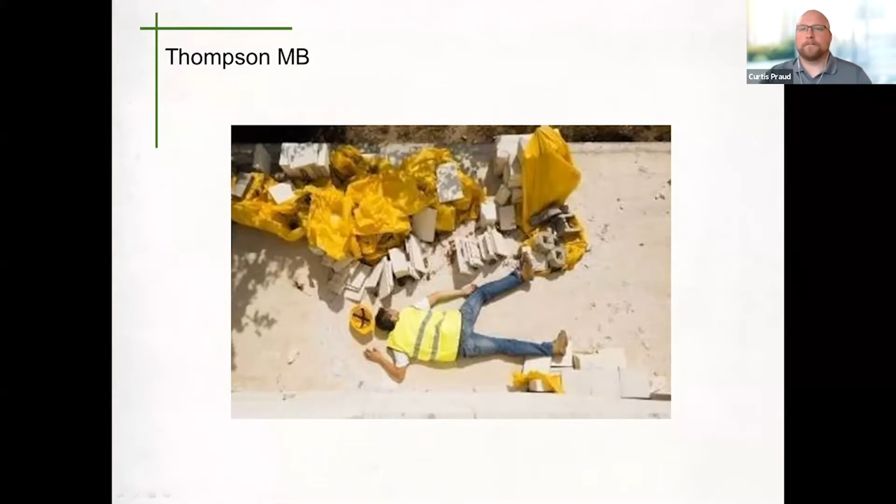On a project, both the owner and the contractor have responsibilities. The owner has the duty to ensure that their workplace complies with legislation, the site is maintained, and that it does not endanger the health and safety of anybody. Besides the owner, the contractor is responsible for safety as well. They have the highest level of responsibility to ensure that the work site and all the work that happens is done safely. This is fairly straightforward.

Contractors set the minimum standard for the site, and everyone follows the law, but we must never fall below the site minimum standards or the regulatory minimum standards.

In Saskatchewan, the Employment Act talks about general duties of a prime contractor. Like I stated earlier, on January 1st, 2015, prime contractor regulations were added to the Saskatchewan Employment Act and Regulations, becoming effective in law. The prime contractor regulations did get their own blue pages as well.

These regulations lay out specifically when a prime contractor is needed and the authority of the prime. It also details the expectations of owners, employers, self-employed persons, prime contractors, and the specific activities that each workplace group shall perform.

Due to the hazardous nature of three industries in Saskatchewan, prime contractor applies strictly to the oil and gas industry, the forestry industry, and finally the construction industry.

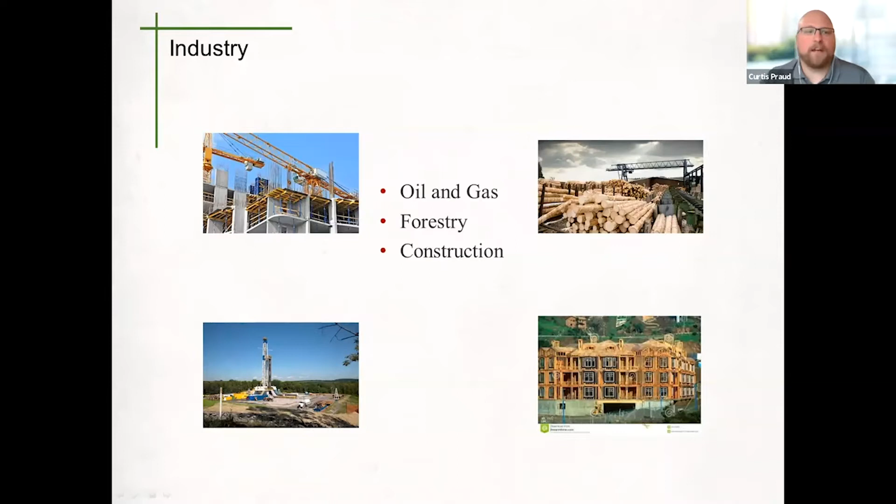This does include all multi-employer industrial, commercial, and residential projects, with one exception. The construction industry does not include activities or operations undertaken by a person in connection with construction or renovation if the worksite has dwellings that are less than 4 units.

It is important to realize the definition of construction means the erection, alteration, renovation, repair, dismantling, demolition, structural maintenance, and painting of a structure. This also includes land clearing, earth moving, grading, excavating, trenching, digging, boring, drilling, blasting, and concreting, and the installation of any plant.

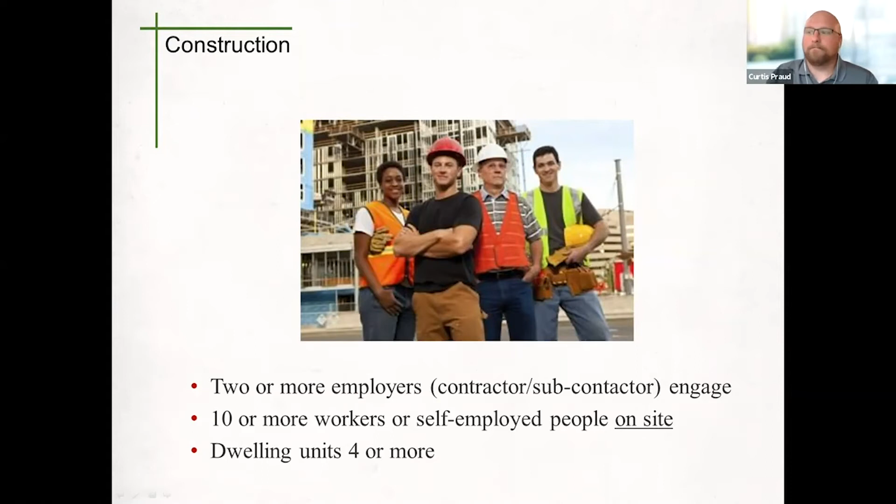In the construction industry, there will be some multi-employer worksites that do not require a prime contractor. For example, a single home construction or renovation, regardless of the number of contractors. So as you can see in these pictures, that is a single home dwelling meant for one family.

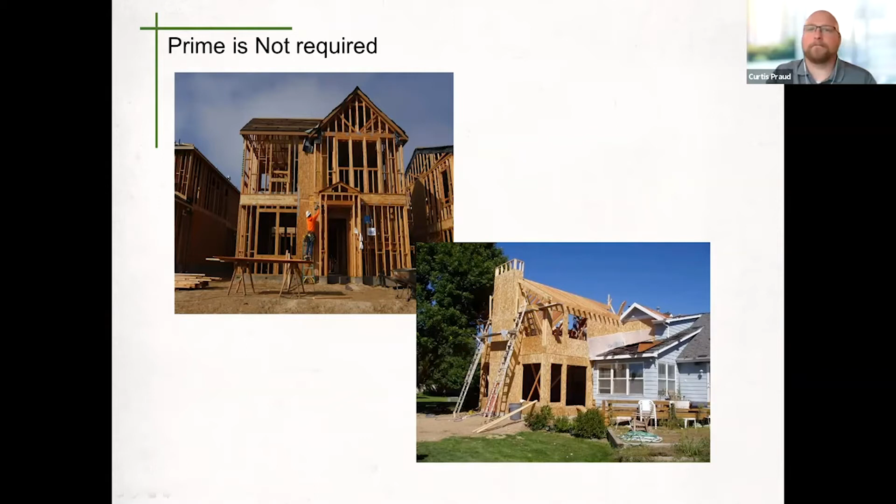Here's a large multi-employer single unit dwelling. This is TV celebrity Drake's house under construction, larger in size and scope than many commercial developments. On this site today, we have 1 general, 5 contractors, and 30 workers. In this situation, prime is not required, as this is a residential construction work site.

As a single dwelling, keep in mind that the acts and regulations are a minimum standard, and a job of this size would greatly benefit from the use of a prime contractor. But like I stated, the owner and contractor in this situation still have the requirements for safety on this site.

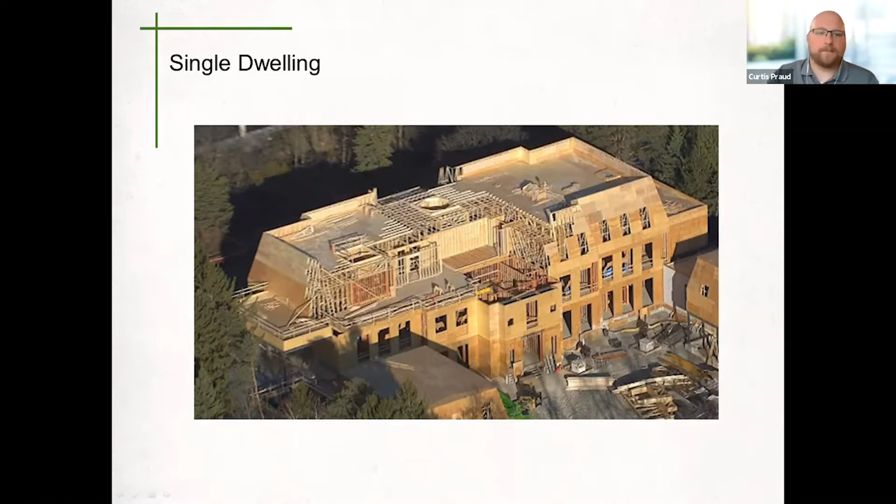Here we have a residential development. There are 8 separate lots with single detached homes on each site, built by one general contractor. All the homes are being built at the same time and are at different levels of completion. The general contractor also has a job trailer across the street. At any given time on this site, there is one general contractor, 5 subtrades, and 30 workers.

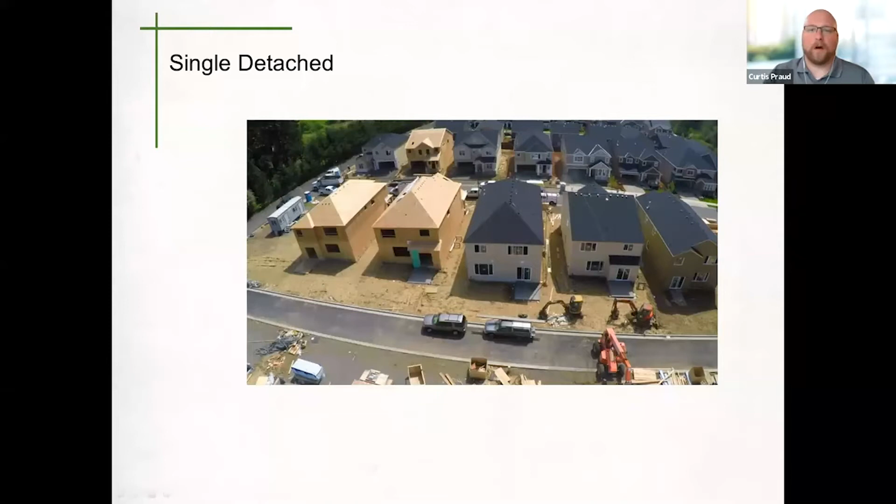In this situation, there is no prime needed, as each work site consists of a single unit dwelling. However, the Saskatchewan Employment Act does still put an onus on the contractor to provide a safe work site.

In this scenario, we have a residential development that is 1 unit with 4 dwellings. Each dwelling is a different level of completion. This is a fourplex with individually titled lots, fences, and distinct property lines separating ownership.

The only difference between this work site and the last one is the aspect of shared walls. Again, here we have 1 general, 5 subtrades, and 30 workers. Because this unit has four dwellings, it is 1 work site. Due to the shared walls and roofs, a prime contractor would be needed. Prime contractor regulations state that the only exclusion is a unit that has 3 or less dwellings. This unit has 4 dwellings.

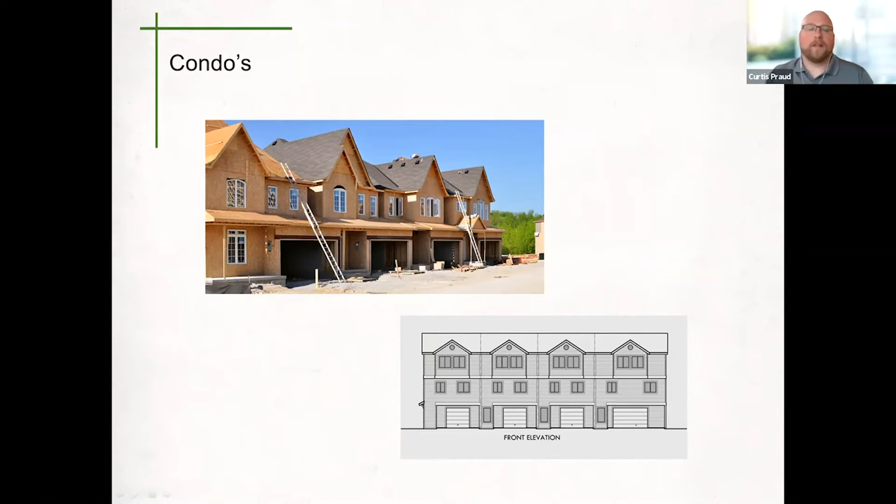This is the most interesting of all residential scenarios: the residential gated community. Here we have duplex and triplex homes built in one location. All these homes share a main address with separate addresses inside the gated community. Here we have one owner that hired 1 general contractor with 5 subtrades and 30 workers on site. So if you've been following along, all the scenarios have had 1 general, 5 subtrades, and 30 workers.

Here there's 13 buildings. 12 of them are residential duplexes, and across the street is 1 small commercial space building. Is prime required? No, because none of the 12 work sites have over 3 dwellings.

This would be different, of course, if any of these duplexes had basement suites, as that would essentially make them a fourplex. In this example, there are no basement suites.

Here there's a lot going on at the sites, like shared roadways and shared access gates and routes. This would all come into play if this was tested in courts.

So let's say we decide no prime is needed, and as an owner, I'm not assigning a prime for this project. What about the construction of the small commercial building? Here, if there were 2 employers and 10 or more workers engaged on that work site, then yes, it would fit the requirements of that specific building.

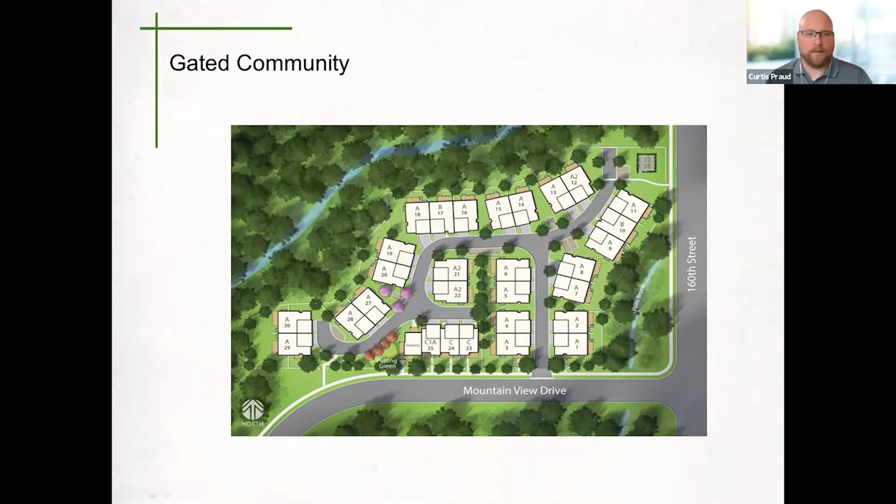But if the owner hires a general contractor to oversee the project and the general contractor arrives when the surveyors are still on site, prime contractor regulations would apply, making the owner automatically the prime contractor.

Now that we've reviewed which projects need a prime and which do not, the project owner is the one to decide who they will proceed with the project and who will be managing certain aspects. Now let's look at the owner's duties.

The owner is going to appoint a prime contractor, complete this with a written agreement contract, and comply with the prime contractor's directions. Once the owner chooses a prime contractor, they are legally responsible to that prime moving forward.

It is important that as an owner, we consider a few aspects when choosing the right prime contractor. First, we're going to look at knowledge. Do they understand applicable regulations? Are they experienced as a prime? You might want to do a background check, refer to references, things like that. Do they have the experience to identify the best equipment and people for the project, and understand the physical environment of the workplace? And training - what training have they received to do their job competently?

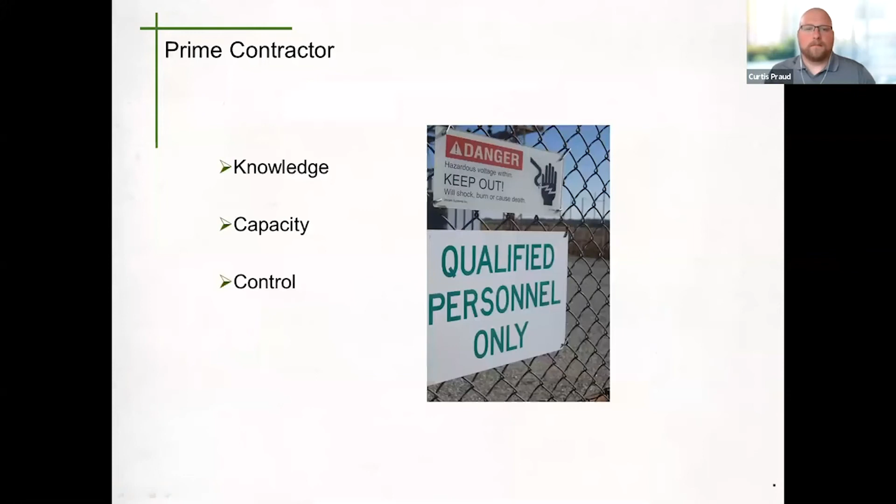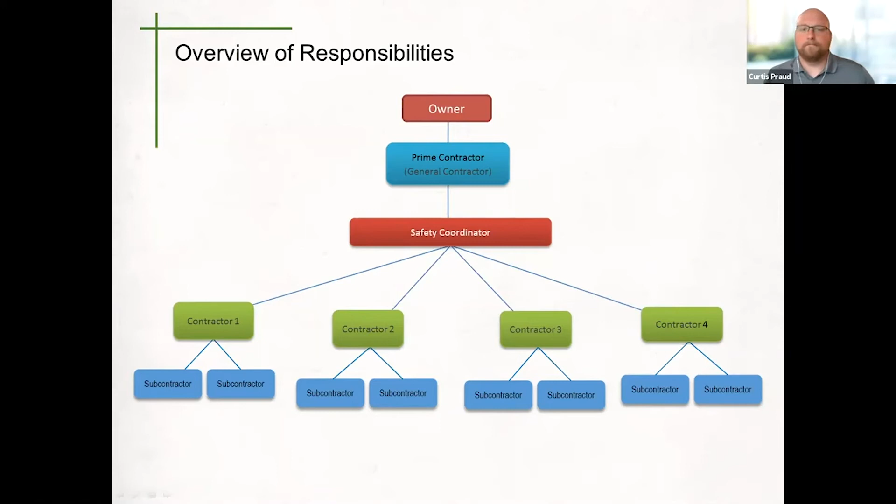Once the contract is signed, the owner is not completely off the hook and may not want to be, for two reasons. One, the cost, delays, and safety mishaps are definitely concerns of the owner moving forward. No matter how you look at this, it is the owner's worksite and it demands that the owner stays engaged. They may be called upon to advise on matters that can only be answered by the owner.

Two, no matter how tight the contract details are in delegating the responsibilities of safety to the prime contractor, the owner will always have continued responsibility to ensure that the prime is fulfilling their contract. The owner may want to periodically evaluate and monitor the prime contractor's performance through reviewing of documentation.

We have already discussed the importance of having knowledge, capacity, and control necessary to do the work. A few very important things will assist the prime in doing their day-to-day operations on site. Healthy communication is going to be the most important aspect of a productive job site.

The prime contractor is required to post their name and contact information on site so they can be easily contacted when needed, and know who the designated supervisors are for each company working on site, so that any safety related communication can be done through the prime contractor and the employer's supervisors. Supervisors ensure their workforce is informed.

It is extremely important to not forget about the short-term workers, like your suppliers or specialty trades. If there are any self-employed people working on site, like your truck drivers or equipment operators, they also need to be engaged with the prime.

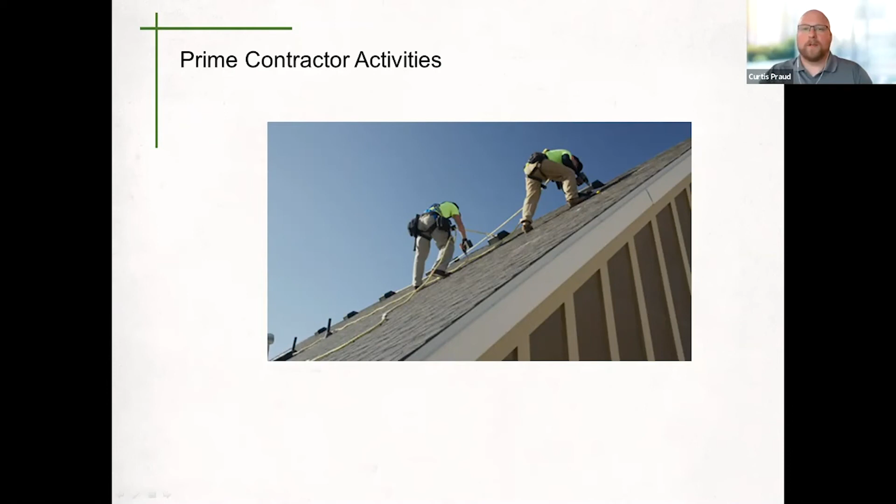The prime contractor must prepare a project-specific safety plan that establishes how they will fulfill their role. This written plan will be shared with all parties involved on the worksite. It sets up the project for success, successfully managing all matters in relation to health and safety, and must contain adequate details to accomplish this.

Once the project is underway, the prime contractor is responsible for the ongoing identification and control of hazards, but also for investigating any safety concerns brought to their attention. As the prime contractor, you have the authority and are required to make the necessary decisions regarding the coordination of activities that affect safety. For difficult decisions, it may be necessary to consult with the employers and workers on site to get their information.

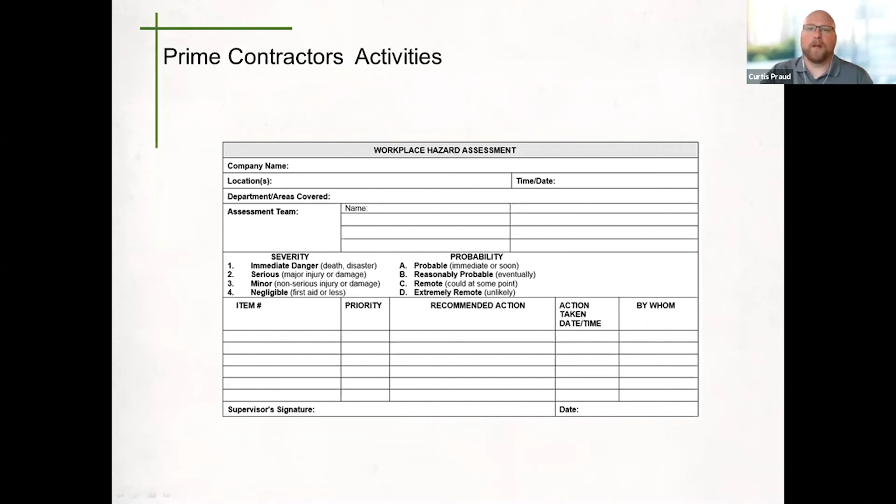Now that we've spoken about owner and prime contractor, the other piece of the puzzle is the workforce. As a contractor or employer working on a site with a prime contractor, it is important that we understand some things. We recognize the authority from the prime contractor. We provide owner or prime contractor with all requested information, comply with prime contractor directions, communicate your work activities, and provide contact information of a

competent site supervisor. The prime contractor is legally obligated to make sure that you work safe and that your work activities do not cause potential harm to others on the site. Here are a few things to keep in mind. The prime contractor has been tasked to coordinate safety on site. As long as the prime's directions are reasonable, then the employer must comply.

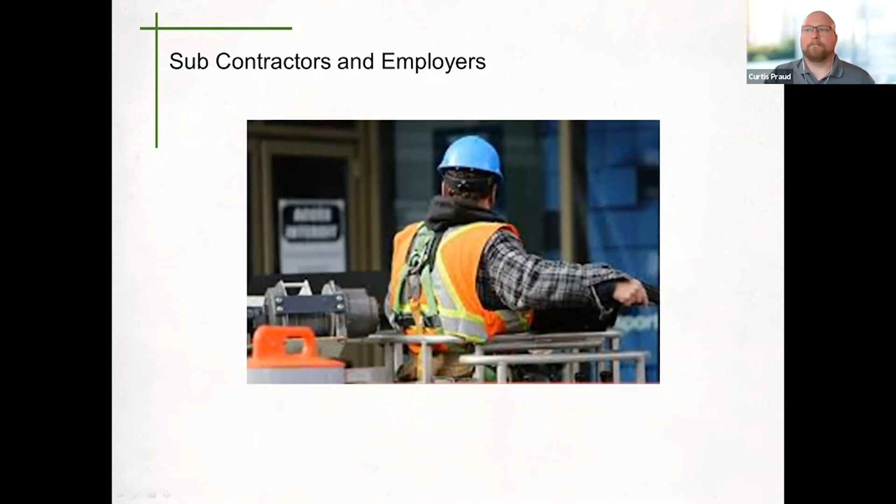The prime is going to need you to provide information about your staff and work activities. This will be done prior to work beginning and during the project as needed. Open lines of communication are going to ensure that everyone is on the same page. Each employer or self-employed person will provide a name of a contact supervisor and contact information to the prime. The employer's assigned supervisor will be the person that is engaged when any safety-related communication is needed.

Everyone on site must work together to ensure that the site can be coordinated safely and that hazards are dealt with. This person needs to be available for the prime when needed. This establishes the supervisor as the main contact for information. The prime communicates to the supervisor to reach the crews.

When an employer's crew member on site has a safety-related issue, they will communicate this to their supervisor, and then the supervisor will then take their concerns to the prime contractor to be rectified. This makes the prime contractor's ability to engage all parties on site achievable. It is going to be the employer's responsibility to provide a competent supervisor. In establishing their competency, the employer will ensure that the supervisors know how to fulfill their role on site. They will be required to understand and enforce legislation and site-specific requirements.

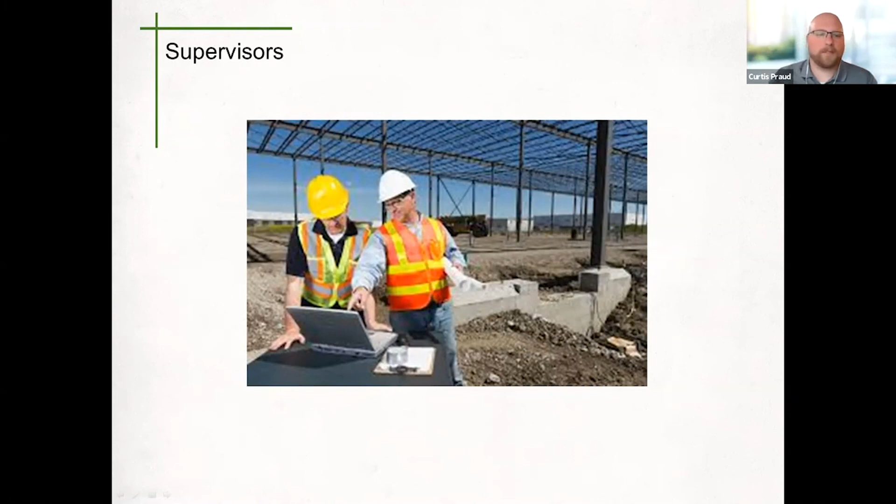So in summary, when is it necessary to have a prime contractor? In the oil and gas industry, in the forestry industry, and finally in the construction industry, 2 or more employers or subcontractors engaged with 10 or more workers or self-employed people on site. And like I said, any dwelling units of 4 or more.

Owners are automatically designated prime when necessary, or they can assign prime contractor responsibilities to another party through a contract. Prime contractor responsibilities: they need to establish a plan, keep open lines of communication, mitigate hazards, and then the owner is going to relieve the prime in writing when duties are finished. Our ability to provide due diligence and ensure that our project-specific safety plan is being executed may come down to the collection of documentation.

It is going to be very helpful to use consistent forms and systems to help stay organized. Share the documentation with those on the worksite, ensuring not to forget the smaller subcontractors. The prime will need to establish a system to show that they are managing their roles effectively. As part of the owner's system to monitor and evaluate the prime contractor, they may require to see documentation. This documentation must be available to any authority.